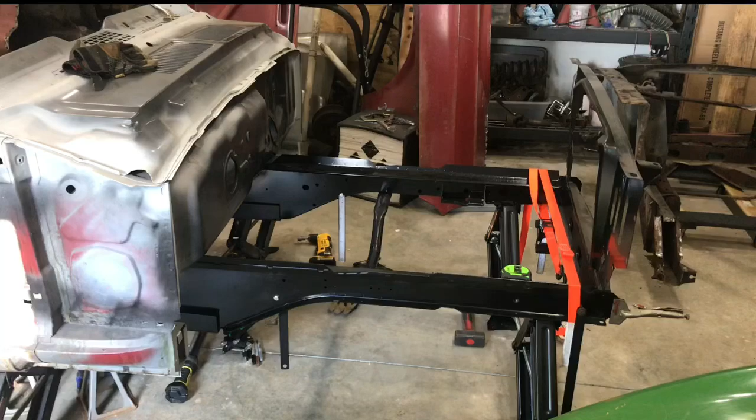All right, so I want to give a quick update. I've been thinking about this for most of the week. I took a little break on it, and I'm trying to figure out where to go with some of this.

So when I was doing my leveling of the car, I have a laser level I'm running under the car. I've got those little ruler pieces hanging down under there from each of these bolt holes, lining up where that height should be on each of the four corners and the middle of the car.

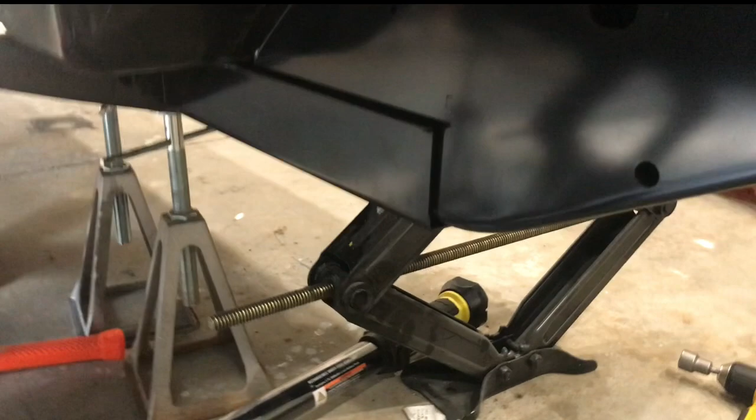And when I got done doing that, it felt to me like the body was too high and the rails still don't quite go under far deep enough. So I still kind of end up with a little bit of a gap underneath the bottom of the floor support when I put it flush to the floor on the bottom. Now I know that's only sheet metal, the floor, so that'll probably conform to whatever I want it to do, and maybe I should just focus on these to be tight, but just something doesn't feel right.

So I did some reading on forums and such online, and one of the things that came up was on your height measurements for leveling, if you look at the numbers, so I've got these numbers in here where I have for Mustang, 15.57.

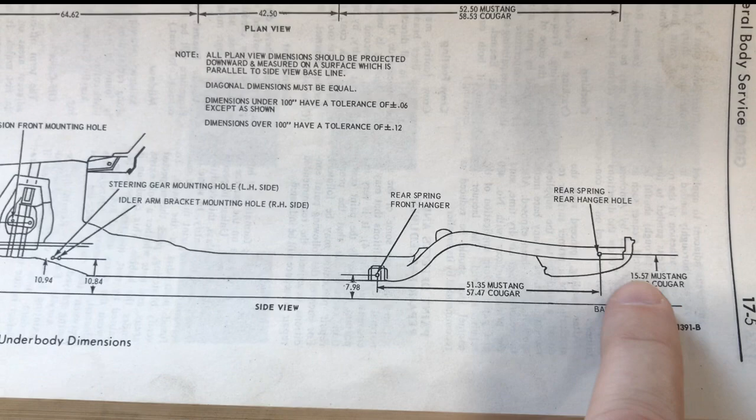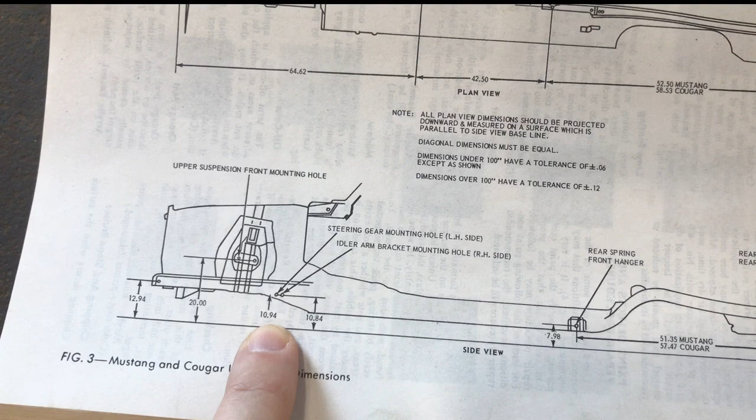I've got that at the back. I've got this one up here, the 10.84 on the, I want to say that's the right side. Left side is 10.94, so driver's side's a little bit higher than the other side, that bolt hole is. And then the front, the 12.94. I've got that, and this guy. I don't have this guy. This one is too big of a number.

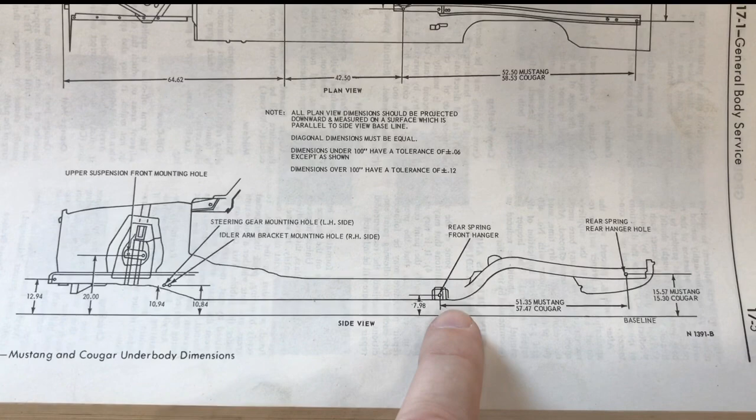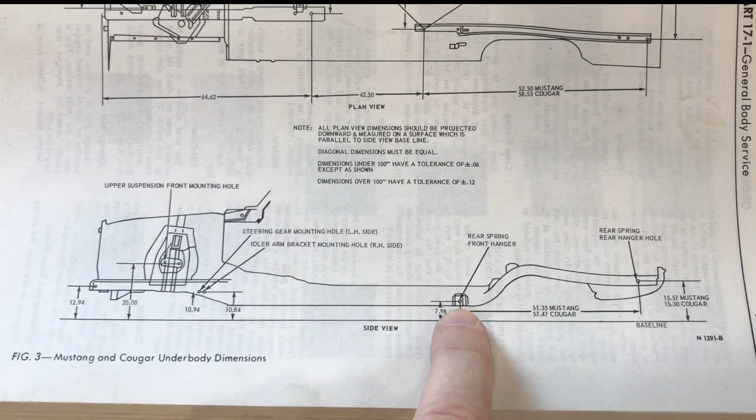So I actually have 8.3 or somewhere in that ballpark, meaning that when I installed the rear rails, I'm guessing at this point, because I had the whole entire floor out of the back of the car, that when I welded them back into the rocker panels, these points had to have been slightly too high. Possibly. It's a guess at this point, but that's my best estimate or best guess at this point, is that they're too high. Because right now when I check it, when I have the front and the back correct, the middle is a little too high.

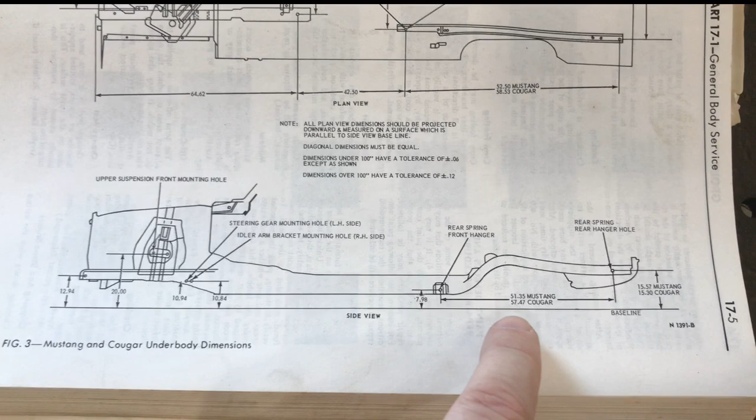Now, does that affect anything? Yeah, sure. You got your leaf springs under here, so I guess you could say you could end up with some kind of loading on the leaf springs. Maybe it won't wind right, or it won't twist, or whatever you call it, like when you go to take a launch. But then again, I'm not even sure what we're doing back here yet as far as suspension, so it may not matter in the long run. But it's just of note.

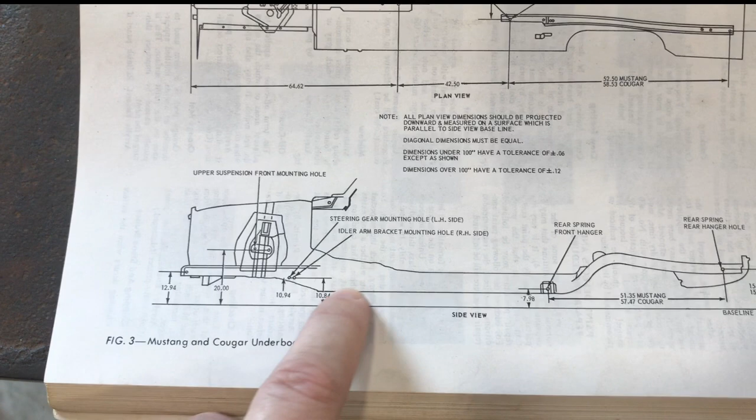But the bigger thing is there is no dimension from the bottom, from this datum line to the bottom of the rocker, and it doesn't even say what this bottom rocker measurement is. So this could very well be a simulation of where the frame rail is, and then they just kind of shot it back in a straight line, or this could be something that they're treating like the rocker. But it doesn't give any symbol saying it's parallel or anything else.

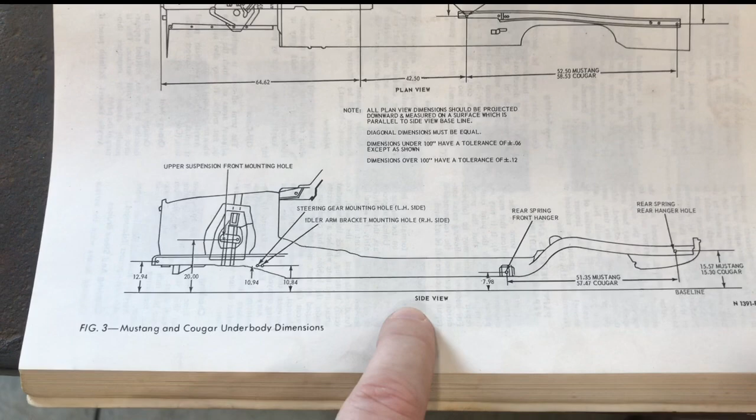So when I looked online, a lot of people, there were some people with the same issue, saying, well, I don't know what to do. When they measured theirs out, they ended up with the front of the car being slightly high. And some people had it anywhere upwards of 3/4 of an inch raised.

Now you can't go all the way to the front. That front extension is at a funky angle, but when you come up to about the pillar, that dimension from there down to that datum line, and then back in here down to the datum line, they ended up with a tilt going up ever so slightly. So right now I've got about a 1/4 inch difference from the back to the front, and the front is up about a 1/4 inch. But it's equal on both sides, so I can't really complain. At least it's somewhat square that way.

But that being said, I still don't know that I like what I'm seeing with the rails. So I'm having some issues here where my number one issue is that when I put the rail into position and I have these heights, these forward heights at the right, where my little ruler is there, when I have the laser at the right height and it's sitting correctly, I have to jack the body an additional distance in order to get the rail under the floor further.

And why I say that is because, like this rail here, when I put the floor support on here, I've got slop in this. So it's not sandwiching tight. I can get my finger in there.

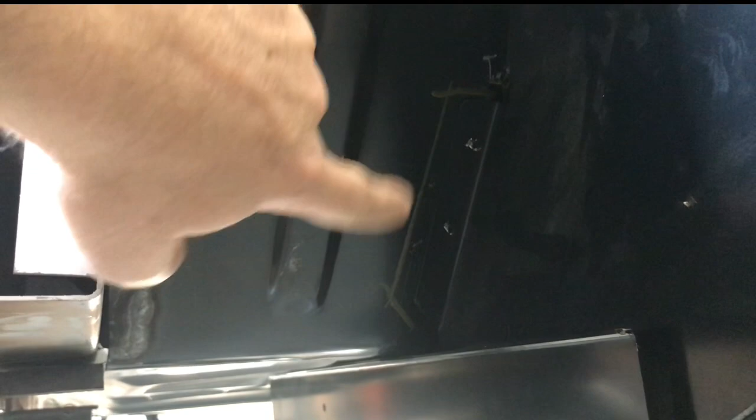So obviously this piece would want to be a little lower underneath, meaning where these are mounted right here on the face of the rock of the firewall. This plate should be slid downward, let's just say 3/16 or so, should be down a little further in order for this to go under a little better. But then when I do that, now this guy is probably going to be sloping possibly uphill towards the back. So in order

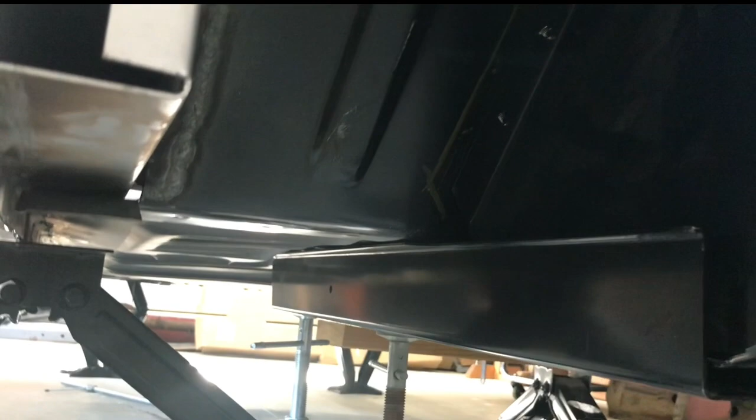to mesh with the floor. Now you can kind of see on the floor, it's kind of hard with this camera view, I think, but I do have a little bit of pressure on it from that screw jack, but I don't know if that's truly making it distort that much or not. But I mean, I had pretty much no load across the front across the floor pan, and it still just didn't look right. So I got to dig into that some more.

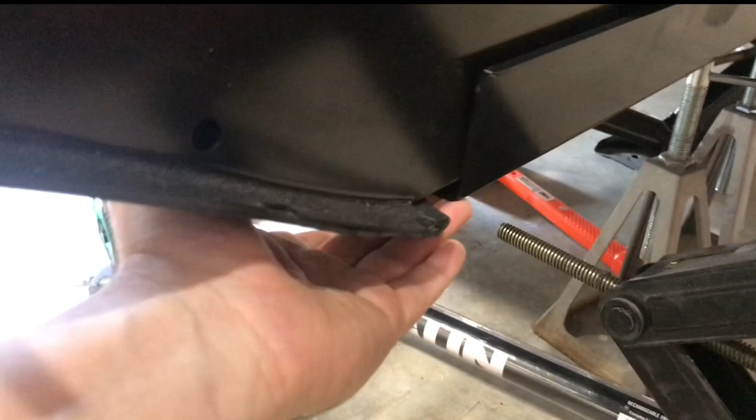However, that's not my biggest issue right now. My biggest issue is that if I come to the driver's side and I look at this rail and how the rail is mounted, yes, I still have a little bit of the elevation problem under here that I might be able to sandwich up, put a little pressure there. I could probably fix this one if, assuming they're both parallel to each other, both rails, I could probably make this floor support work.

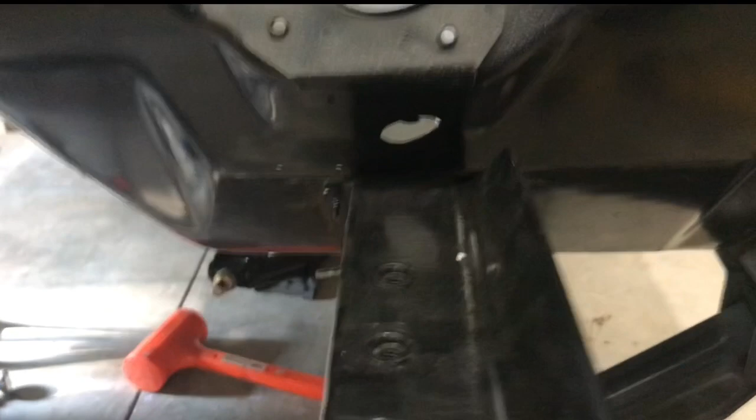But what I've found doing some measuring is that the flange on each side of the forward frame rail, this flange from outer flange, from out here where it mounts up against the firewall, from outer flange to edge of outer flange, this one was an 1/8 inch wider than the passenger side.

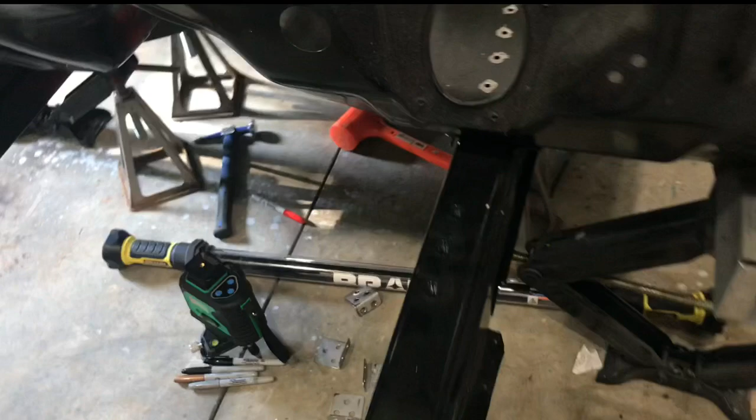Now that in and of itself, I thought, well, okay, it's flanges, maybe they cut it funny or whatever. But it gets worse. So this one, if I look at it, take a peek at this, I can squeeze this in, but it's got a little bit of play in here. Maybe a 1/16 of an inch, but I mean, you put clamps on it, tighten it down, weld it, and then you seam seal or whatever when you're done. You probably live to fight another day there.

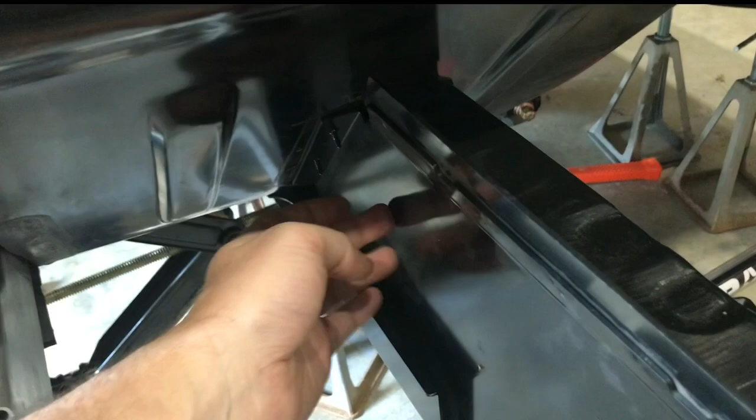However, this side, if I take the inside and flush it up against the face, I come around to the way out on the passenger side here, I've got a huge gap. I mean, I've got a 1/4 inch gap. So that led me to measure this guy, to measure the thickness of this section here from this face to this face in here. And turns out this frame rail is a 1/4 inch thinner back here, skinnier than that frame rail on the other side.

No idea why. All I can assume is it's welded incorrectly. So they must have pushed this panel in too far and then welded it. But what's weird is, like, in here, I don't have like a crazy overlap or anything. So it's really baffling to me that could happen.

Okay, so with the floor supports out, you can now pretty clearly see the flange on the bottom of this is sticking out past that face. So, I mean, the lighting makes it a little challenging here, but there's a lip right here that's, every bit of, well, this little weird cut part here is probably 3/16 long or something, maybe in the middle, but it's only about 1/8 to 3/32 here.

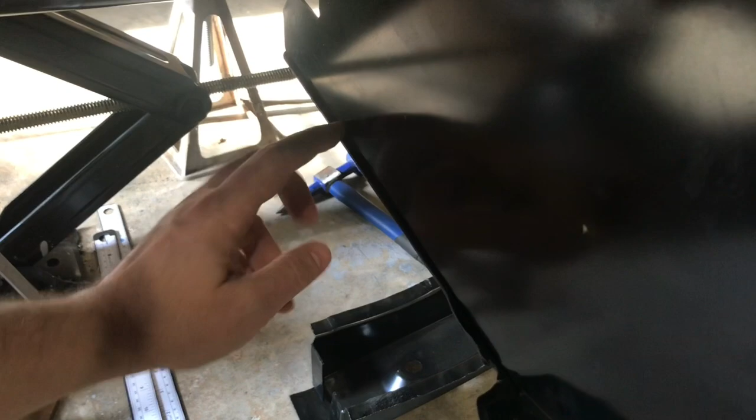But if you look at this piece here, this is the piece that is technically pushed in. So if I take this, if I pull it out, or try to get it to pull, I can tweak that out some, but there's only so much I can do with these 2 screws up here holding that top panel. So I'm not sure what the best method will be here yet, but what I probably need to do is drill some spot welds out, because I can make that bend out, but that only gets me in the rail up to about here where it makes sense, and then it's going to start getting out of kilter up in here.

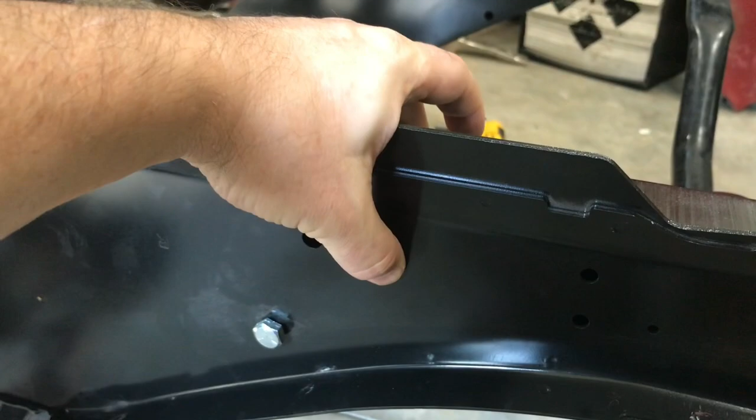So what I probably need to do is measure up in here, what's the distance from side to side, make sure that's correct. If it's correct up into like here somewhere, then I can worry about just doing the tail end. But if it's incorrect all the way up into here somewhere, then I have to potentially take all the spot welds out through here and then pull the whole thing out, respot down there just to get it to hold that shape.

All right, so I'm gonna take the screws out from in here to try to release it from there. That's why I put some jacks under the bottom to support it when I take that off, so it doesn't just drop. And then I've got to just kind of finagle it back a little bit. I've still got the cross brace, or the engine cross member in here, so it should keep it from twisting around too much. And I've got vice grips here holding the radiator support on there. Even though I've still got to clean that up a little bit, it's still holding my 27.5 inch dimension, which I want to retain.

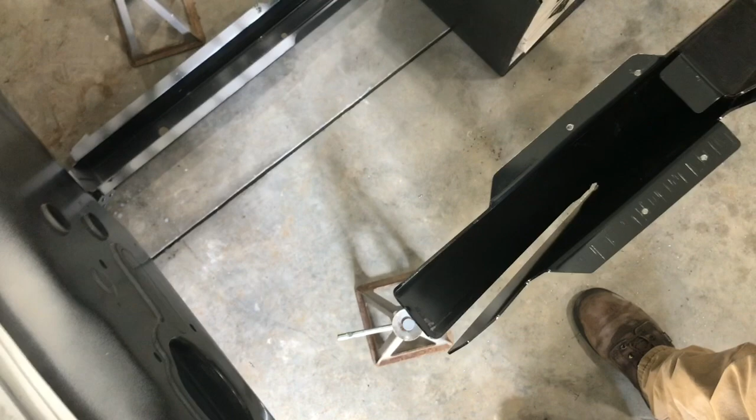All right, yeah, so that opened it up, obviously. So now you look at the gap, which is of course more than it needs to be, but I have the flexibility now to do what I need to do.

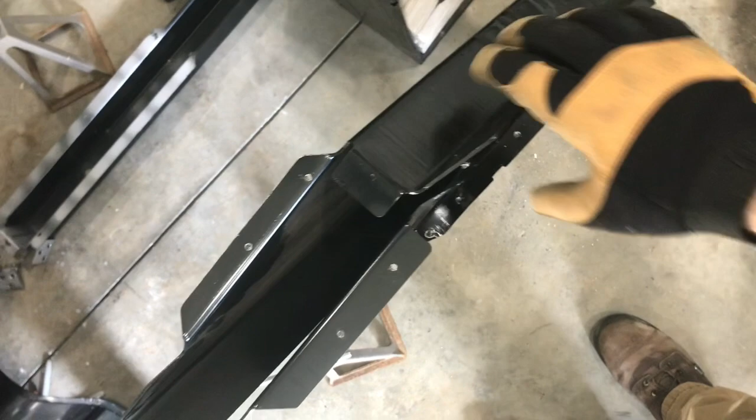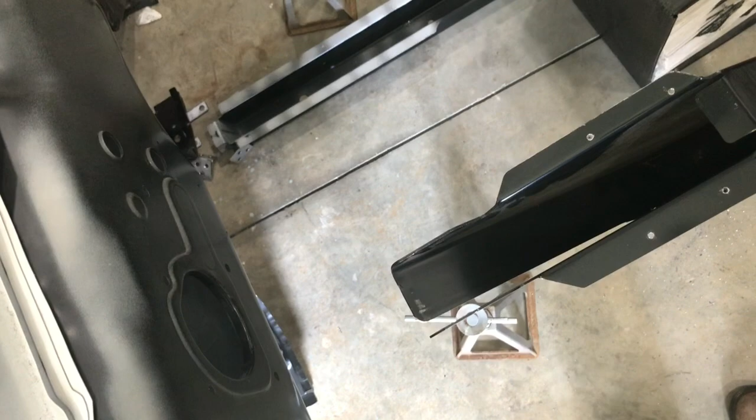I'm going to have to clean up the back of these, because some burrs went through. I'll probably stick a cutoff disc in there and knock those down. Then this can be sandwiched back over. I just have to make sure I retain the dimension in here, so I don't lock it in at the wrong dimension like they did in the first place. That's the thought, at least.

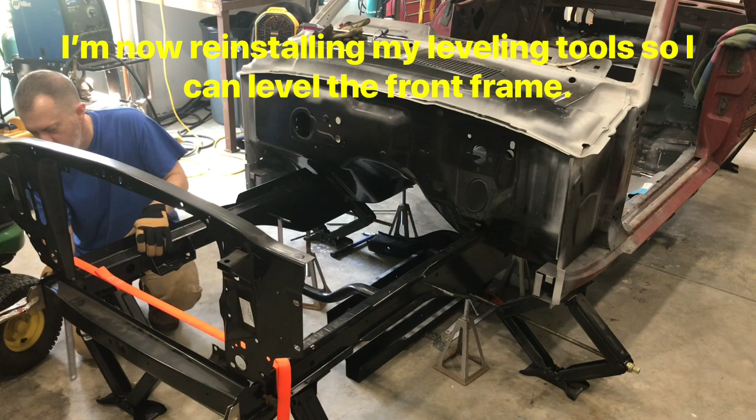All right, so in case I didn't explain previously, which I think I did, I have a laser level under here shooting lines out, and I have little pieces of sheet metal I had made that were cut on a plasma cutter.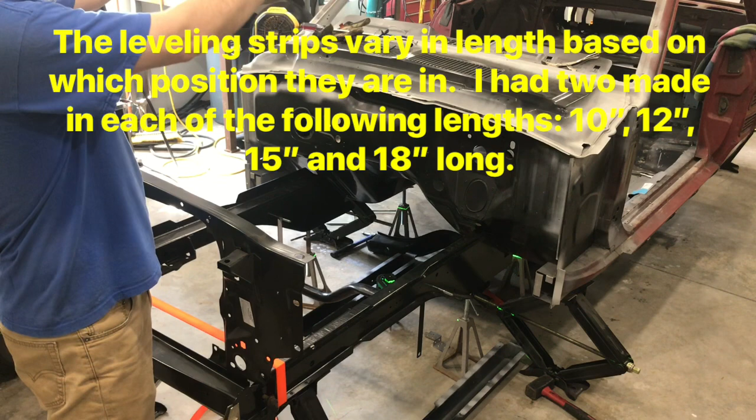It's an online service called Send Cut Send. Just painted them and slapped these ruler stickers on here I got from Amazon. Then I knocked the hole out to where my zero is on the center line of this top hole, so when I hang it I can see how far down the line hits, and I'll know if my dimensions are correct. So I've got a couple here, a couple there, a couple on the front of the rear torque box, and then a couple at the back coming off the leaf spring mounts.

So I'm just looking for the numbers that are in the manual.

All right, so I've got the rails screwed into place. I've got 4 screws in here and 4 screws on the other side that come down through the flanges, kind of like I did previously, but I just had to drill a few more new holes. So I've got that screwed into place.

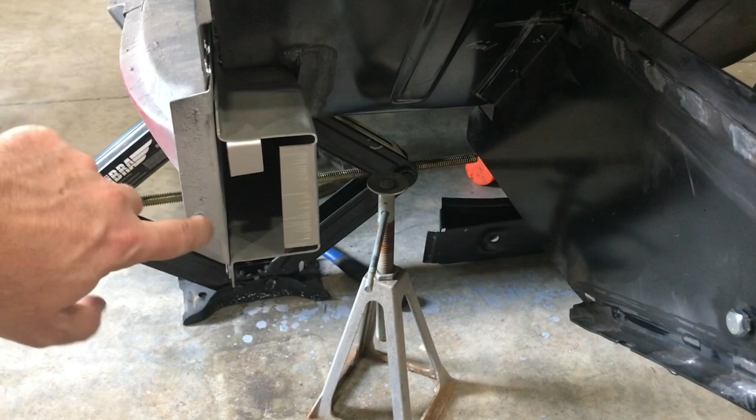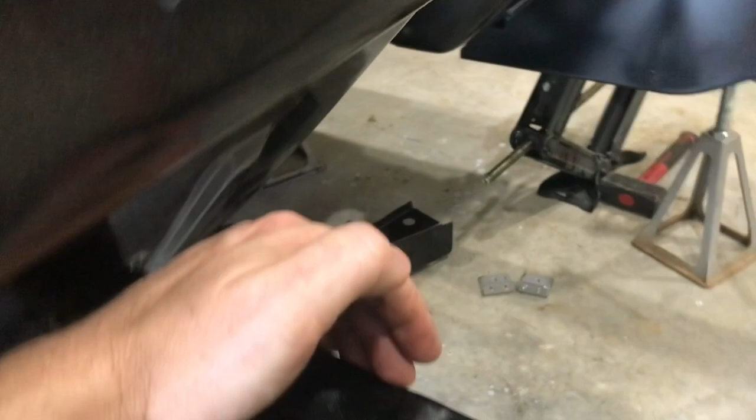Before I did that though, I measured the distance from the existing rocker inner panel, not the convertible rocker, from that face to this face, and made sure it was even on both sides. It's like 11 inches on this one, so 11 inches, and that gives me my 27.5 internal dimension across there. So at least I know I'm right there, and screwing it against the face, honestly, kind of takes some of the diagonal dimensions out of play, because once you pull it against the firewall, there's really nowhere else it can go.

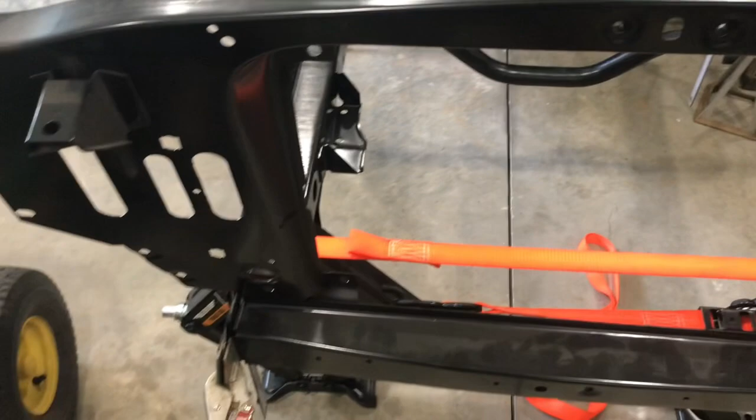So I've got it pulled against there. I'm still going to check some numbers, obviously, but I've got that pulled there, with the engine cross member in there holding that dimension too. It's about as square as I could probably get it, realistically. And I have the height figured out as well, so I think that's okay.

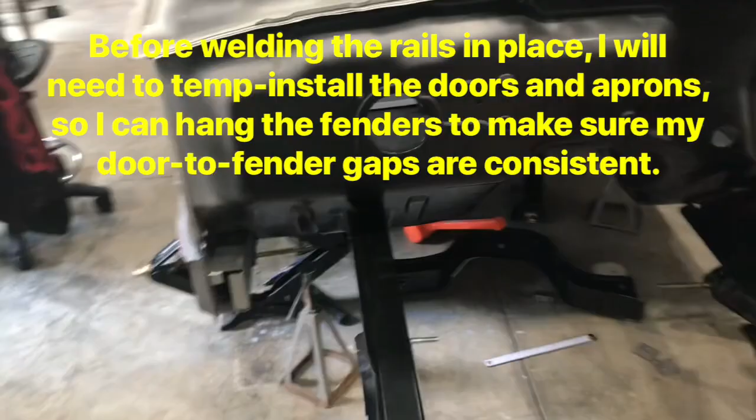But again, like I said, I still want to try the aprons at some point when I get to that. But for now, I just took the floor supports and stuck them on there just to temporarily see how they fit, and they fit a lot tighter than before.

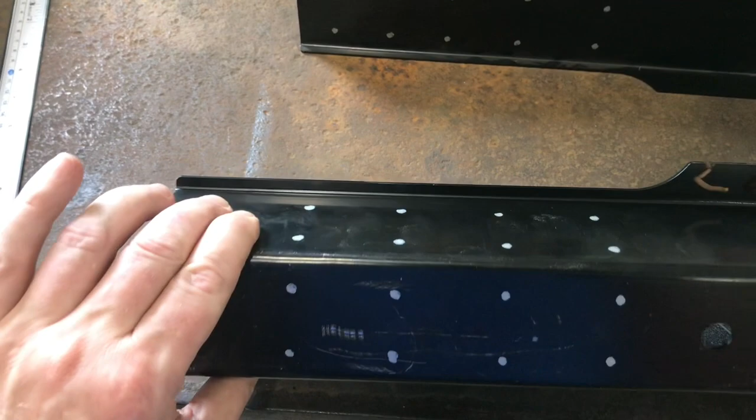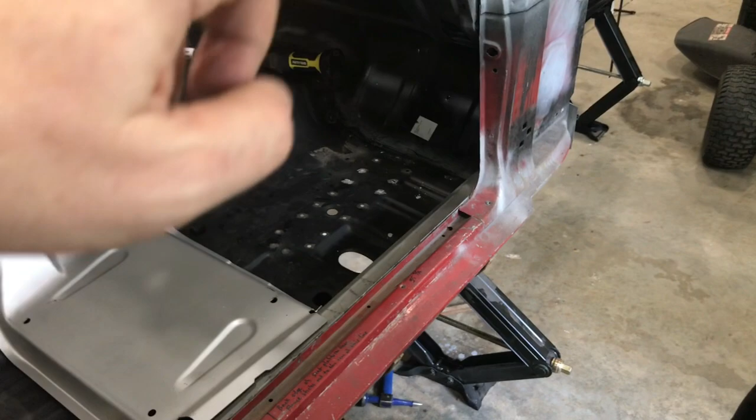And so then I just got done marking them where I'm going to drill all my spot weld holes, and drill all that, get it ready, and then I'll have to put them back on temporarily, mark all the spots where the holes will come through over there so I can bare the metal on all those spots, and then I should be ready to weld them on whenever I get to that point, just so it's all prepped and can go together a little more seamlessly.

So that's pretty much where it is, and then when I get those on there, I'll come back and get to the cross member and try to make sure that thing fits in there correctly. I'm going to have to bend that flange down a little bit, just to get it to fit up far enough, because it seems to be hitting before it even seats. So there's definitely going to be some mod on that thing too, but it's good progress for today.

At least I got this rail repaired, and got everything back up where it truly belongs, from what I can tell. I'll learn more later, but I feel pretty good about where it is right now. So that's about it for now.